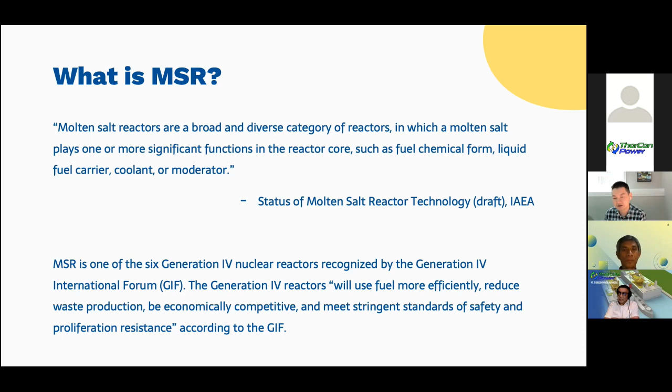And it is necessary to recognize that MSR is one of the 6 Generation IV nuclear reactors recognized by the international community, which has the potential to use fuel more efficiently, reduce waste production, be economically competitive, and meet stringent standards of safety and proliferation resistance.

If you have any questions, please, you can leave your comments or raise your hand. We can have those discussions after the presentation.

Okay, so the history of MSR started in the United States. There was an aircraft nuclear program back in the 1940s and the 50s, supported by the US military. And as you know, the US Navy has chosen the PWR to power their submarines and carriers. But at that time, the US Air Force actually was thinking about using molten salt to power their airplane. And the idea is to let the airplane fly in the air for a very long time, so they can be used to defend against potential Soviet Union invasion.

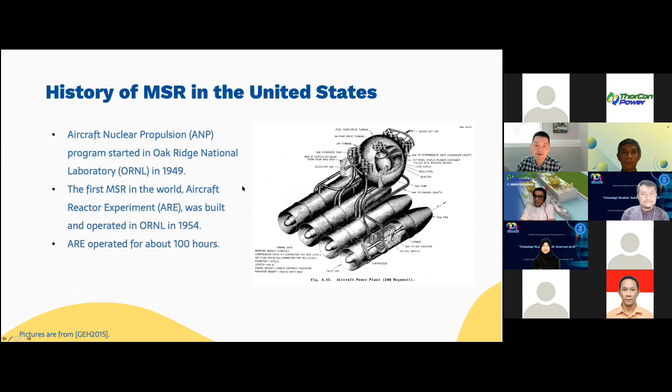And the MSRE operated from 1965 to 1969, which is 4 years, and it can be considered as a long-term operation. And most of the information we have at this time regarding MSR was from the MSRE, and almost all of the designs you have seen nowadays are more or less connected to the MSRE. The MSRE has used uranium-235, uranium-233, and plutonium-239 as its fuel. It was operated at full power, close to 8 megawatts thermal.

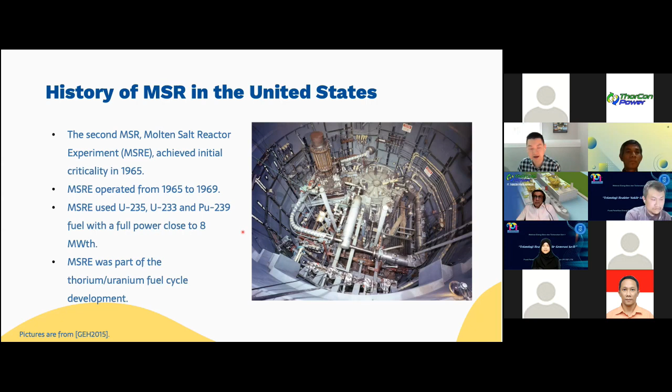The MSRE was actually part of the thorium-uranium fuel cycle development. So when they developed the MSRE, they were thinking about using thorium. And the reason they put the uranium-233 into the MSRE was to prepare for the future thorium fuel. So the MSRE is very famous, but at the same time, and shortly after that, there were a lot of efforts going on in other countries to develop MSR. And I'm going to do a short introduction on those in alphabetical order.

So China actually started MSR development back in the early 1970s in SINAP. The purpose was to develop a reactor that can use thorium fuel, because it was perceived that China has much more thorium reserve compared to uranium. And actually a zero power cold state MSR achieved its initial criticality in the same year. And it only took 3 months for the test bed to be built and reach criticality.

And in France, the AMSTER concept was proposed by EDF, and another concept called TMSR was proposed by CNRS in the late 1990s. I have to point out that I'm listing the time here when a major concept or major project was initiated. If you consider the early R&D effort, you could find even earlier papers that were published.

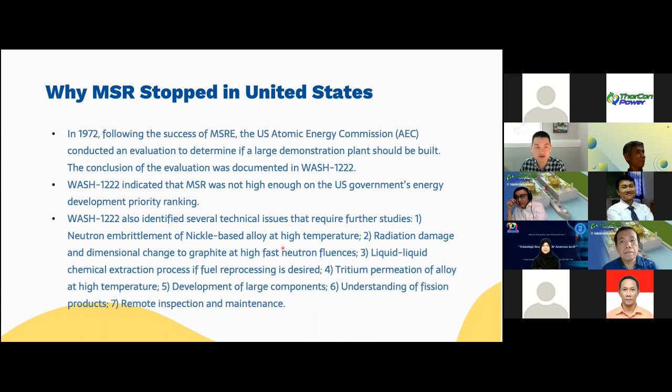So because of the funding from the AEC after the evaluation, the US MSR program was refocused to resolve the technical issues identified in this report. For the next 10 years after 1972, all the effort was actually on resolving the technical issues I just mentioned in the previous slide. By the end of the 1970s, the technical issues were largely resolved. So you would think by that time the US would be ready to develop a large demonstration MSR, but the opportunity was gone. The MSR never became sufficiently important to obtain the required resources for the next phase of development in the US until recently.

As you can imagine, by the early 80s there were several nuclear accidents, and public opinion in the US changed. So the MSR never got adequate resources to be developed into commercial use. You will hear a lot of arguments on why the US stopped, but I'm trying to give you an official answer to that, and everything can actually be found in that WASH 1222 report.

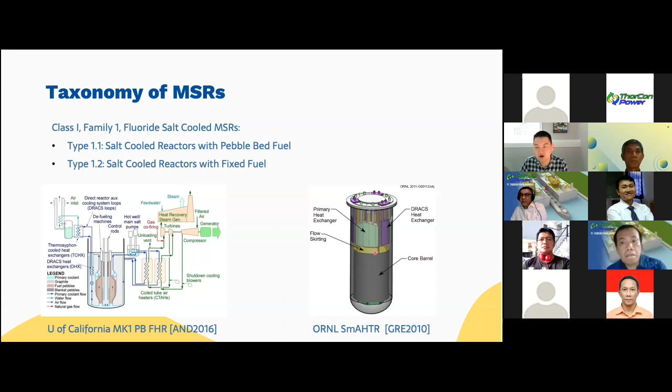Okay, class 1, family 1, type 1.1 is the salt-cooled reactor with pebble bed fuel. The example I'm giving here is the University of California, Berkeley's design, which uses pebble bed fuel as the fuel, but just uses the molten salt as coolant. And the other type is salt-cooled reactors with fixed fuel, which is the Oak Ridge concept. It's very similar to the Berkeley concept, but the only difference is the fuel. It's not a pebble bed fuel, but a fixed slab fuel. But they all use molten salt as coolant, not as a fuel.

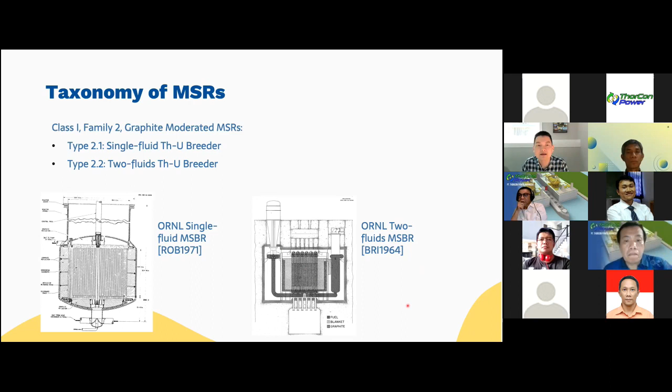Also, the ThorCon 500, again, is the same type. And also the Japanese Fuji, and also the SINAP test reactor. So all these four concepts actually belong to the single one type. So these concepts are most closely related compared to other types.

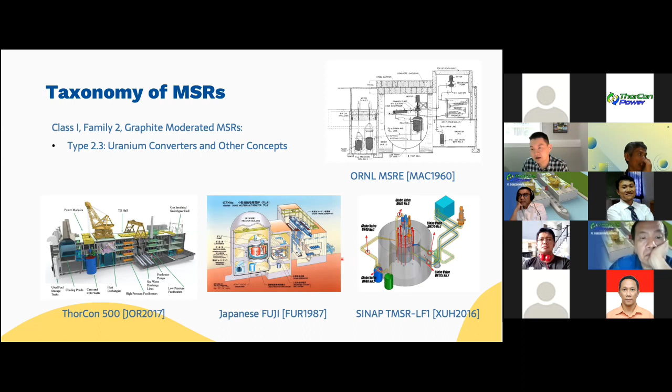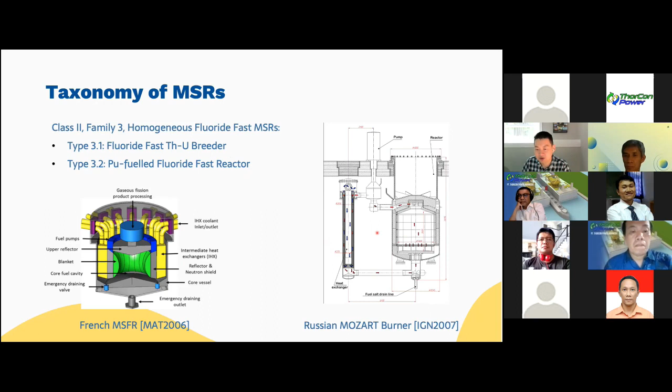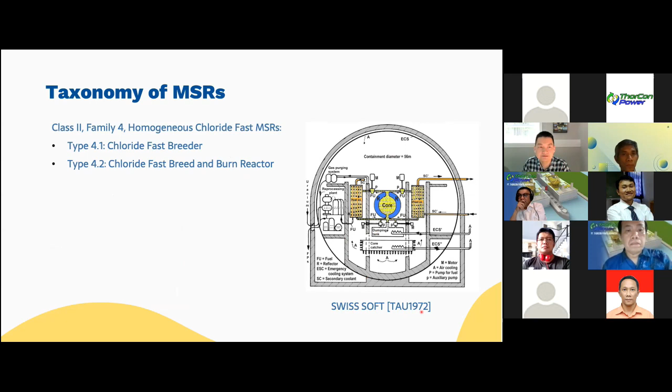And then we have this homogeneous chloride fast MSR. The example is the Swiss SOFT concept. In the class 3, it's a heterogeneous concept. We have both solid moderator heterogeneous reactor and liquid moderator heterogeneous reactor. And the Oak Ridge ARE back in the 50s was using beryllium as moderator. So it falls into the concept of solid moderator heterogeneous reactor.

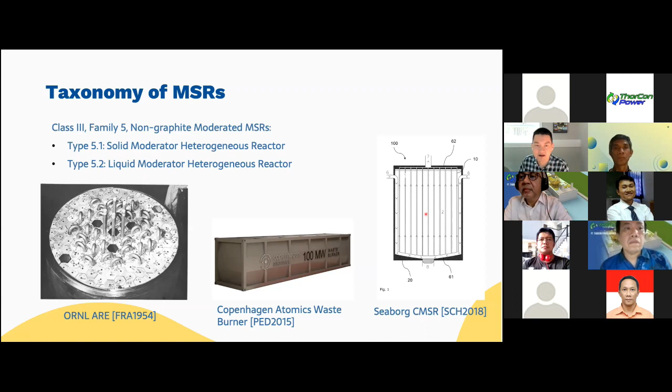And the last one is the heterogeneous chloride fast MSRs, where we have heterogeneous salt-cooled fast reactors. A typical example is the Moltex stable salt reactor. So the molten salt fuel is not flowing. It's being sealed in fuel pins. So it works like the PWRs, and that's why it's called a heterogeneous reactor.

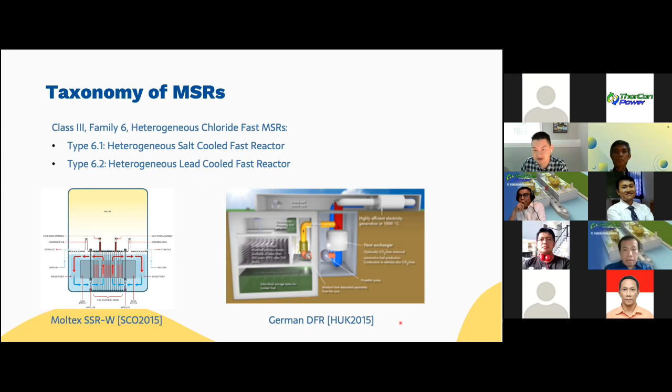And some designs actually are not using molten salt as a coolant. They use liquid lead as coolant. So it's called a heterogeneous lead cooled fast reactor, where we have a German DFR concept here. And there are other different MSR concepts that cannot be put into the previous categories. So you have all kinds of interesting concepts. I'm not going into the details of that.

I think it's worthwhile to do a comparison of the MSRs. As I mentioned, the Oak Ridge MSRE, the SINAP TMSR test reactor, and Thorcon belong to a single type, closely related to one another. So I think it's worthwhile to compare those three to give you an idea of what are their differences, what are the common features.

So if you look at these three designs, they have different power levels. The ORNL MSRE's actual thermal power was 7.34, and the SINAP one was supposed to be running at 2 megawatt thermal. So both of them are in the low power range, and the Thorcon 500 is a commercial reactor. Each Thorcon power module will have 250 megawatt electric, and 2 of them will give you 500 megawatt electric.

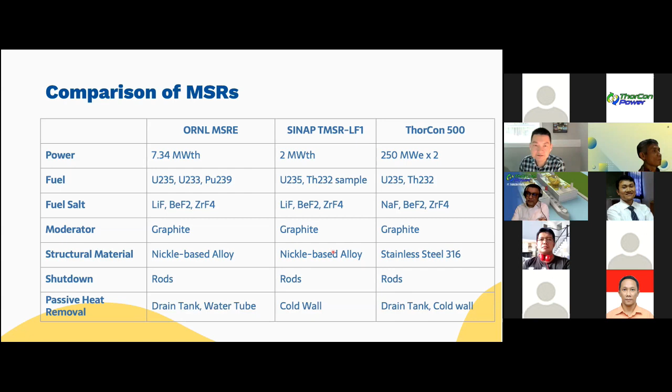So this just gives you a general picture of the comparison of Oak Ridge MSRE, SINAP TMSR, and ThorCon 500. Okay, so since we're mentioning the SINAP TMSR, I'd like to use several slides to give you a short introduction on what's going on in China in terms of MSR development.

And so the MSR project started in China in 2011. It was a major development, major because the total investment is definitely above 500 million US dollars. That was a major effort by the standard of money spent. The reason the government was willing to invest is because the MSR has the potential to use thorium resources in China.

The Chinese government was concerned about the supply of uranium. As you may know, China currently has many PWRs, and it's on track to build and operate 100 PWRs. And the majority of the uranium is from either Australia or Kazakhstan. So the government would like to have some domestic fuel supply. So they're looking at thorium, and MSR was considered to be one of the top candidates for using thorium.

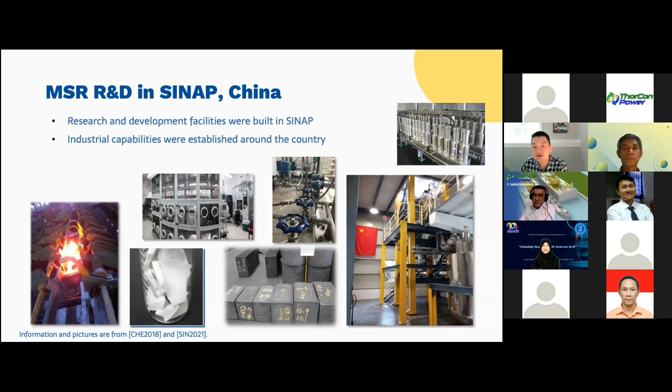The benefit of this: first of all, you can do experiments on it. And second, I think even more important, is that you gain experience on both making these components and operating this facility. For the first reactor, you will definitely meet some challenges even making those components in the workshop by the suppliers, and going through this will get the suppliers ready for making those components for you. When you install it or test it, you will find other issues, and it's much easier to fix those issues in the pre-fission test platform compared to the nuclear power plant itself. So that was an excellent idea. Looking back, without this, the project might have been further delayed because of those unforeseen issues.

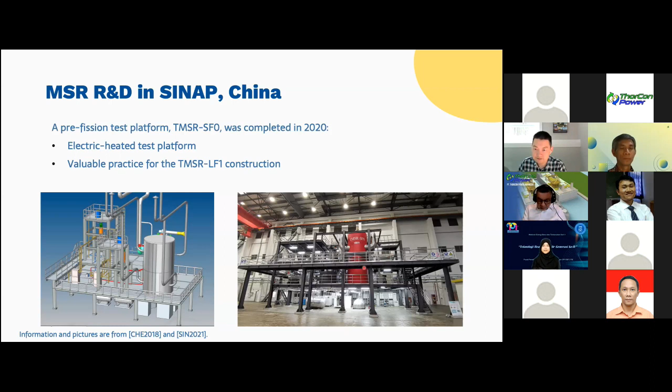And the construction license was granted in 2020. I left SINAP at the end of 2018. I was leading the application for the site license and also the application for the construction license. By the time I left the institute, we had completed the PSAR and the application for the construction license. So after a year and a half, the license was granted by the regulator. At this moment, they expect to reach initial criticality next year. The plan was originally this year, but due to the pandemic and other issues, it was delayed for one year.

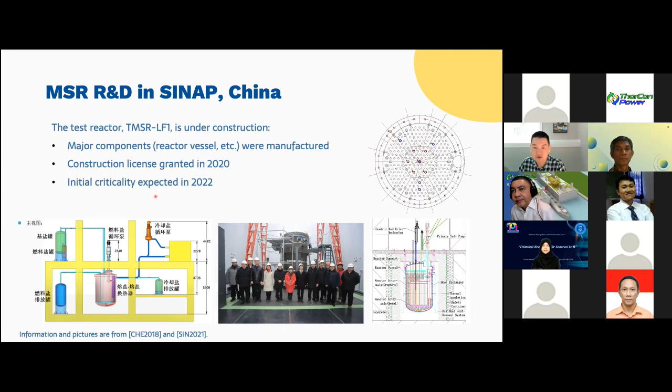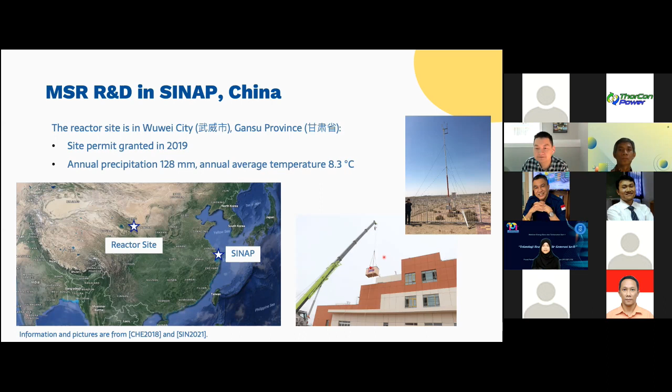Okay, so my last few slides will be focused on my experience on the regulatory process in both China and Canada. In China, the regulatory framework has several layers. On the top is the nuclear safety law, and then under that, it's the nuclear safety regulations, which they call HAS. It's issued by the State Council or the ministry. And then under that, it's the nuclear safety guides, which they call HAD. It's issued by the ministry. And then there's mandatory national standards, and there's also recommended national standards.

So the regulatory body in China is the Ministry of Ecology and Environment. And within this ministry, there's a National Nuclear Safety Administration, which is solely responsible to regulate the nuclear part. But the environment impact assessment is done by the Ministry of Ecology and Environment. So there has been a major update of the process in October 2019. So I'm talking about the process after that.

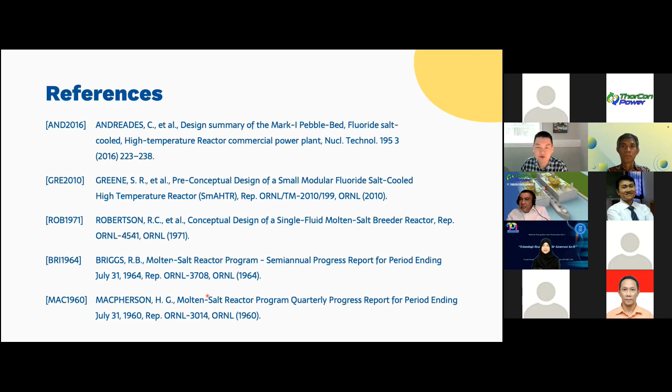Okay, so I guess that's all the slides I had. I put all these references here. So if you want to know more details about the things I'm talking about, you can definitely check those references. And also, I'll be happy to answer all the questions you have. Thank you very much.